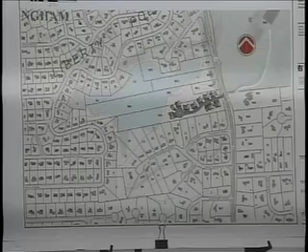As Jeff was saying, the existing setback off the road for the existing building, which sits about right here, the existing home, is about 45 feet off the property line, and we're well 20 to 25 feet back of that existing home. The general layout of the terrain on this property slopes primarily from south to north. The dark green and light green lines represent sort of the upland from the lower land being designated wetland areas, and with that restrictions relative to our building capacity. The roadway basically is coming in off of Main Street in a place just about where the existing driveway curb cut exists.

I think your battery's dying, Jeff.

And the ground to the north of that drive is low, and the ground to the south of that drive is high. It's our intent at this point to leave that terrain.

Okay, great, thanks.

It's our intent to leave the terrain within this frontage off Main Street as much as possible as it is, in order to retain the existing trees that are in this area. The existing trees in this area will give us separation from Main Street to the first pair of buildings, as well as giving us opportunity for enhancing that landscape with additional new landscape, pretty much screening the buildings from the Main Street frontage.

The terrain dropping on the roadway basically comes in where the existing driveway is, as I said, but it's also pretty much hugging a landform that is dropping off to the north. And what we've done here with siting these buildings is we've tried to sensitively place them relative to the terrain and not do a lot of additional unnecessary filling. So all these units along the north edge of the road and at the very western end of the cul-de-sac, they all have the capacity to have walkout basements.

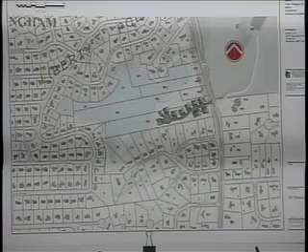The site soils are listed as Quonset and Warwick. I know that means nothing. What it really means is the soils have been mapped by the U.S. Department of Agriculture Soil Conservation Service, and those types of soils are very gravelly. They pass water through them very quickly, and they generally have a deep groundwater elevation.

In order to confirm that, we went through the site and did a series of 6 test holes down in this area here, and then 3 down here in the area of the proposed septic system, and then 3 more following the roadway out. So 1 in the cul-de-sac, 1 up here on top of this bridge, and then a little bit further down. And all the soil tests that we did confirmed the mapping done by the U.S. Department of Agriculture. We did find some groundwater indications down here. This is a lower area.

Let me just talk about topography. I know Mike touched on it. The way the site works is, if you come in up the driveway, it's about elevation 116, so that's 116 feet above sea level. And then it goes in, and right in here there's a depression. It definitely was gravelled out at some time. It's large. As you go up the ridge, the high point is about elevation 135, and then that drops off to the west and to the north. The wetland elevation is about elevation 94.5.

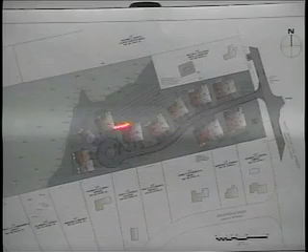I know it's hard to see on this particular plan, but you can see the lines, they kind of go northeast, southwest. And there's about 1,200 feet of trench underneath the ground. And what will happen is the buildings will be served kind of like a sewer line. It'd be a sewer main running down the street to a septic tank, located down here in the cul-de-sac.

Because the system is over 2,000 gallons per day, it's required to be pressure dosed. So although we could feed it by gravity because of the elevations, we have to pressure dose it. So in addition to that septic tank, there's also a pump chamber there, which will pressure dose the system. Now, when you flush your toilet, it goes into the tank and trickles into your system.

Pressure dose, what it does is it measures a dose based on the size of the system, and maybe 4 to 10 times a day, it will dose the system. It's actually a better design. It's a better, more environmentally safe type of system. So that's it. And the system is a minimum of 50 feet off of the wetlands, 10 feet off property lines, and 10 feet off the building slabs. And they'll be, again, located in the back there.

The stormwater management for the project, which I know is a concern on every project I'm on. As I talked about earlier, the site has really good soils. So for purposes of design, what we've done here is we've looked at where the water goes today. Where the water goes today is, of course, into the wetlands, off to the north, and off to the east a little bit here, because as I said, there's a hill that comes up here. So we look at each of those areas, and we see the rate and volume of water that leaves the site.

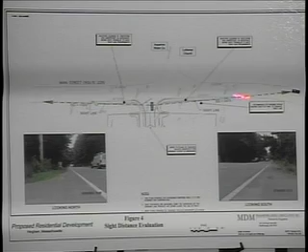With regards to vehicles traveling along Main Street to the north, there's approximately 400 to 500 feet of sight distance to be able to see the intersection, which falls within the range, greater than the 320 feet.

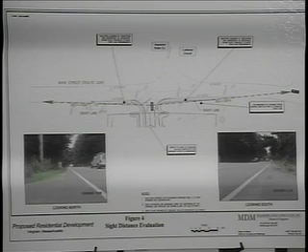Again, with regards to the trip generation and the impact that this will have on the operation of Main Street itself, it's really not any material impact, given that it's less than 1% of the existing traffic on the roadway. We do conduct intersection level of service analysis, and while there are certainly surges of traffic that are really produced by the signal to the south of the site, following those surges there are adequate gaps in the traffic for vehicles to exit the site.

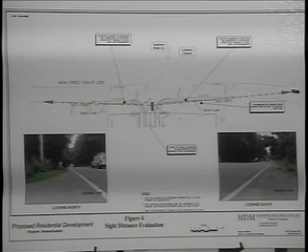So at this time, I will turn it over to Mr. Engler to discuss the architecture.

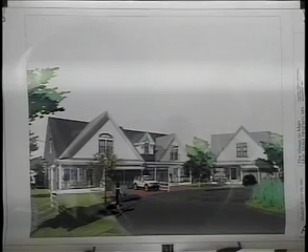Members of the board and members of the audience, I'll apologize in advance. I'm not an architect, as I indicated earlier. Unfortunately, Jim could not be here this evening, so I will do my best to stand in, but I am obviously quite familiar with our proposal. So in conceiving and strategizing relative to the overall design and what we wanted to include within our community, there were several key elements that really are the underlying driving force of what we're proposing.

One is compatibility with the historic nature of Main Street. These are not intended to be reproductions of old homes, but they are intended to complement, if you will, what exists on Main Street. We also want a pedestrian scale to the clustered housing that we've provided. And obviously, we want an attractive appearance and an interior layout that appeals to a large audience.

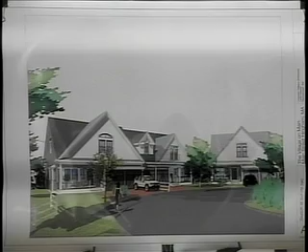So the gabled roof forms of the buildings closest to Main Street derive their massing, the window arrangements and the general design imagery from existing historic homes on Main Street. Obviously there's a lot of different architectural styles, and some don't look like this at all, but we're certainly trying to be sensitive and think the units that we've proposed are in keeping with the look and feel of Main Street. So the architectural characteristics, the height, the gabling, the footprints and whatnot are consistent, at least in our estimation, with other homes that you'd find in the neighborhood.

The homes are going to feature clapboard siding, some shingling. There might be a Hardie type material used, which is a composite that looks like wood, that's very energy efficient. They might be wood or they'll be a Hardie siding, but those that are familiar with that type of product know that it has a wood appearance, not a vinyl siding or something of that nature.

As I mentioned earlier, many of the units feature first floor master bedrooms. We think this arrangement appeals to a lot of the homeowners we're targeting. It allows for efficient zoning of heating and cooling and creates a low profile, as the images would suggest, of the second floor. As I mentioned earlier, there's no third floor on any of these buildings. So once again, we think contextually it certainly fits within the greater community.

And the exterior color schemes will be muted colors. They won't be designed to stand out. They'll be designed to blend in. So, beiges, greens, sages, browns, earth tones, stuff like that. Not necessarily the most exciting colors in the world, but certainly nothing that's going to generate a violent negative reaction.

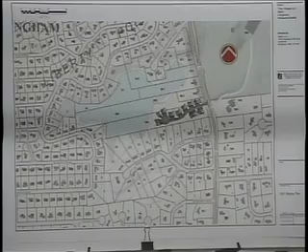There's probably a very good topographic reason for it, but was any thought given to straightening out the roadway and maybe flipping one of the houses back to the southern side to give a little more elbow room? So just to make sure I see what you're saying, you're talking about these two that are bunched? Correct. And you're talking about maybe moving the road? Yeah, just the geometry of the roadway, and is there a good reason for that?

I'll defer to my colleague on this one, but I do know that we look carefully and determine that the configuration of the roadway takes into consideration to the greatest extent possible the natural terrain. So moving the roadway would require more excavation, cut and fill and whatnot. I don't want to speak for Mike, I'll let him answer that. One thing we did aspire to do is, the houses are on the southern side of the roadway, or the majority of them, by design.

The distance from our abutters on Highfield is significant in terms of how far our structures are from those houses, as I mentioned earlier. They're all much closer to each other than they'll be to our houses. So with the exception of the front duplex, which is still, I don't have it in front of me, but well over 100 feet between the first unit on Highfield and the first unit on the northern side of our roadway. Mike, do you have anything to add relative to the location of the roadway?

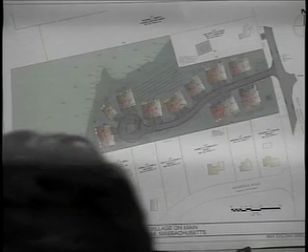So to some degree, we were trying not to have just a straight shot in from the aesthetic standpoint. I understand your point relative to the spacing of the buildings. It would probably work, but we thought that was a better trade-off aesthetically. Okay. And the septic, what I can barely see is the lines for the septic system. Those are close to the foundation walls of the houses, right? But they're all within the setback requirements of the foundation walls and structures. They're outside the requirements. Outside, yeah.

I'm not sure what I did with my pointer, and the residents of Highfield would know better than I would, but... That pen's not going to work, Jeff. Someone's got it. This unit right there? Yep, that house.

That house is actually the closest to us, but to the best of my knowledge, as of several months ago, it still remains abandoned or deserted. No? I misspoke then. Oh, it's been demoed? Okay, well, we'll have the audience participate later. I apologize then.

Forget that point. But if you could stay there, because as you went through the list of waivers in response to Todd's question, and looking at the booklet, what stands out to me is the point Joe Freeman raised: in many ways we're being asked to sit as the Board of Health, because the largest number of waivers relate to septic systems and Board of Health issues, which is not usual in these 40B procedures. So we are going to be paying a fair amount of attention to that. Point noted. To the extent that we need to satisfy you or your peer reviewer, we understand and appreciate that.

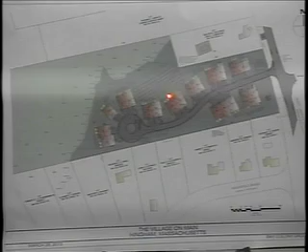There's a wall, a small piece of wall right here, which is retaining high ground on the north side. There's a piece of wall. Yep, here in the corner, which is retaining our property, which is higher than that ground. So, does any of the design of this roadway rely upon the presence of that wall? Just the houses? Yes, the grading associated with the houses.

And what's the distance from the back of the houses to that wall, as it's shown on the plan? 12 feet to the wall. And what's the drop-off, the distance from the top of the wall to the bottom? It varies because the contours are crossing the property line at an angle, so the top of the wall can step with the contour lines. What's the highest point? So let's just say 3 feet. That's the highest? Yeah, 3 feet, 4 feet.

There are walls associated with this area too, on the entrance. Are you going to have fencing on the top of those? We'll either have them parapet height or we'll have fencing, and there'll also be a guardrail. And where does the water drain to on this?

Just so this is not a private discussion, if you could get closer to the mic and try to project so that everyone else can hear it. My question is, where does the water generated from this project drain to? Okay, you want to answer, Bill? You're the engineer. I am, thanks.

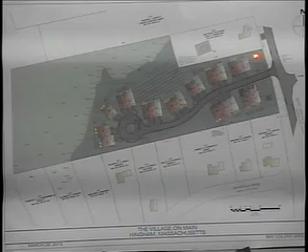The water currently on this site drains off mostly to the northwest, to the north, drains off to the east a little bit, drains into this hole here, and drains slightly off to the north in this area as well. And the way we're going to capture it is each of the buildings will have their own roof drain system, which will infiltrate into the ground for each of the buildings. And then the runoff from the roadways and the driveways will be going to two subsurface drain systems, one in this area and one in this area.

And are they serviced by a vacuum truck? Yeah, those Stormceptors, or whatever type of water quality inlet eventually gets used, will require servicing, as will the catch basins. And that would be up to the homeowners association? Yes, because it's a private road.

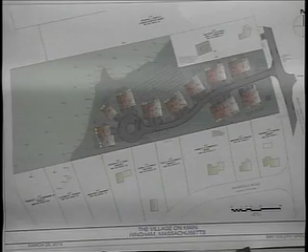Street lighting? We show a gas lamp look type of street light in the area, and I'm not sure how many we have. There's probably 3 or 4 down the length of the road, but they're not the Cobra head type of system, and I don't think we've chosen the actual design yet. We've just given a general description of it.

Do our plans show the streetlights? Yes. It shows the location, not the detail. Oh, okay. Right.

Now, on the plan, you've got some kind of structure underneath the roadway? What's that? That's the drainage system down in this area here, what you were just pointing to. There's a drainage system here, and then the big block-looking things. One is a septic tank, and one is a pump chamber, and they go out to the system, which is out in the back here.

Are you requesting a waiver from that? I don't think we allow that typically. Yes. You are. All right. I don't want to take up all your time. Thank you.

Okay, so at this point, if there are abutters or neighbors or concerned members of the community who have a comment or question, this will be your first of several opportunities to speak. When I call you, please come up to the podium, give us your name and address, and then ask your question. Yes, back there.